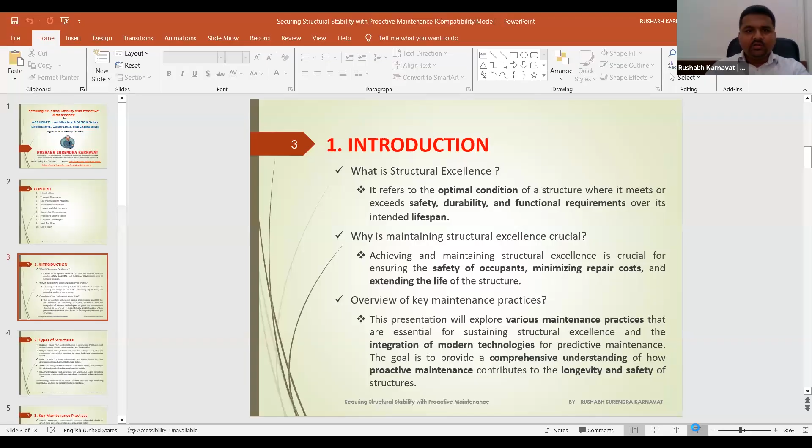Starting with the introduction, what is structural excellence? It refers to the optimal condition of the structure for which it is designed, and it always meets or exceeds the safety, durability, and functional requirements over its intended lifespan.

Next is why maintaining structural excellence is crucial. Of course, it is crucial for the safety of the occupants, minimizing repair costs, and extending the life of the structure, or what I can say, at least remaining the life of the structure for what it has been designed for.

Overview of the key maintenance practices: this presentation will explore various maintenance practices essential for sustaining structural excellence, or structural stability, and the integration of modern technologies for predictive maintenance. The goal is to provide a comprehensive understanding of how proactive maintenance contributes to the longevity and safety of the structures.

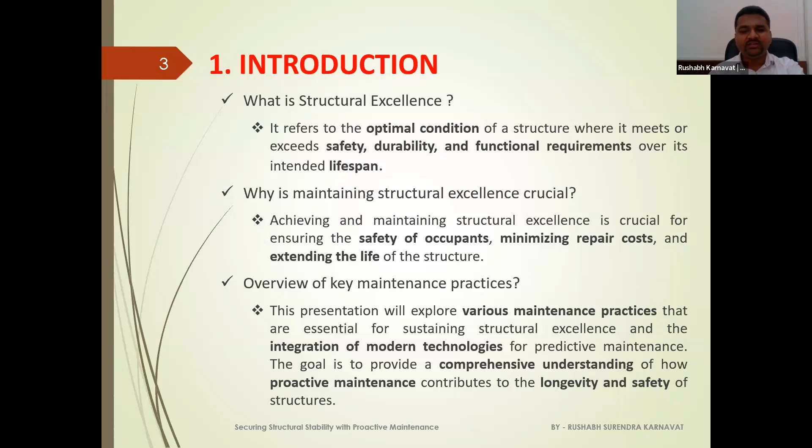Let's understand the types of structures, like basic buildings: residential homes, commercial skyscrapers, or composite structures, residential, commercial, or industrial, which require upkeep to ensure safety and functionality.

Then bridges: of course, bridges always play a vital role for transportation networks, and their inspection and maintenance are needed due to their exposure to heavy loads and environmental factors. Just two months back, we heard that more than 12 bridges collapsed in a state - not ours - and dams need rigorous monitoring to prevent structural failures.

Dams are critical for water management and energy generation. Towers, including communication towers or observation towers, face challenges like wind and weathering that can affect their stability. Industrial structures such as factories, warehouses, and PEBs these days require specialized maintenance to withstand harsh operational conditions and ensure worker safety.

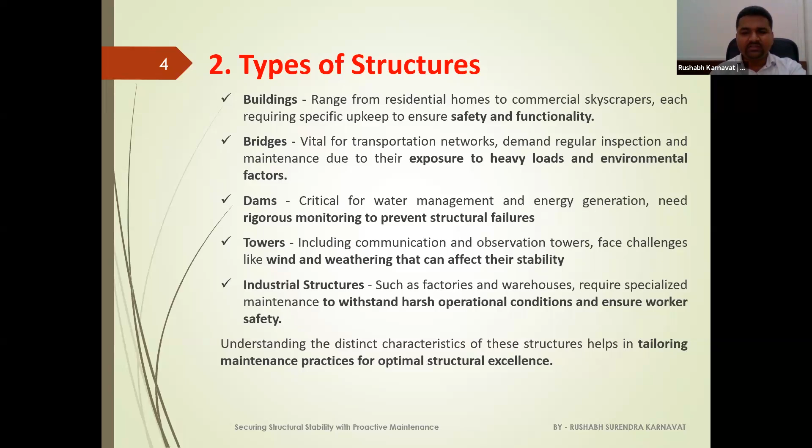Understanding the key maintenance practices: first is regular inspection. If the diagnosis is not correct, the treatment won't be given properly. So regular inspection always plays an important role, involving scheduled routine checkups which detect early signs of wear and tear, damages, and potential failure.

Preventive maintenance - as someone beautifully said, prevention is always better than cure. So the key maintenance includes preventive maintenance, which focuses on routine upkeep activities such as cleaning, sealing gaps and voids, or minor repairs, which are designed to prevent more significant issues from arising.

Corrective maintenance is what I believe is called treatment, necessary when unexpected damages occur requiring immediate repairs - like in rainy season, when leakages start, immediate repairs restore the structure's integrity.

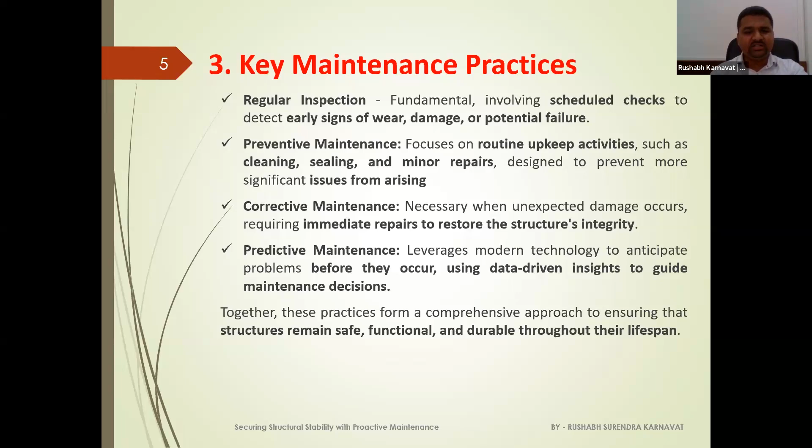Predictive maintenance leverages modern technologies for anticipating and predicting problems before they occur, using data-driven insights to guide maintenance decisions. Together, these basic four practices form a comprehensive approach so that structures remain safe, functional, and durable throughout their lifespan.

Now understanding the inspection techniques: first comes visual inspection, the most basic but essential method, allowing detection of obvious issues such as cracks, corrosion, misalignments, seepage, leakage, or dampness.

Next is non-destructive testing, for deeper insights, like ultrasonic testing, magnetic particle testing, dye penetration testing, or radiographic testing, which help identify internal flaws without damaging the existing structure.

Now comes structural health monitoring, which takes inspection to the next level by using embedded sensors and technologies to continuously monitor the condition of the structure in real time, which always detects changes that could indicate potential problems.

In the last decade, drone inspections have become increasingly popular for assessing hard-to-reach areas. Recently we did some inspection for an ESR where it was very difficult, hard-to-reach areas, so drones provided detailed aerial surveys that can reveal issues not visible from the ground. So drone inspections are becoming popular day by day.

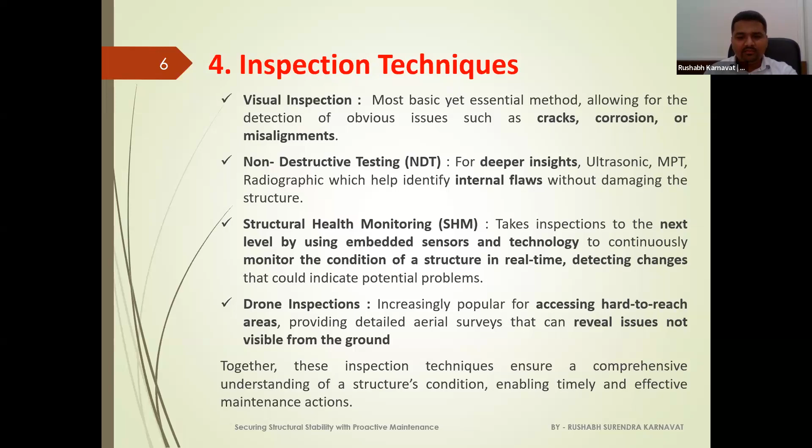Now let's understand the preventive maintenance.

What I mean is regular cleaning is a key aspect involving the removal of debris, dust, dirt, and contaminants that can lead to deterioration, especially in areas exposed to the atmosphere or environment.

Surface protection is becoming popular. People protect using protective coatings and paints. Earlier, paints were used just for aesthetic purposes, but nowadays they provide protective coatings as well, like anti-algal, anti-peeling, or waterproofing properties to existing structures, and sealants for materials like concrete and steel against weathering and environmental factors.

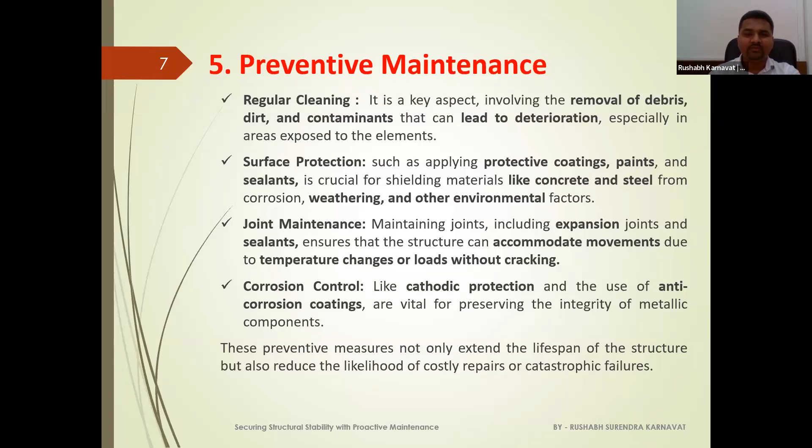Corrective maintenance, when we talk about it, we call it treatment. Repair techniques such as patching cracks - in monsoon season you might see potholes everywhere and patchwork going on, or resurfacing damaged areas, like when we go for restoration of RCC buildings. If you're traveling by road, you'll see patchwork going on in RCC buildings.

Replacement - in some cases, patchwork won't suffice the purpose, so components that are too damaged, or beyond logical and economical repair, then replacement entirely replaces the complete surface or that particular member. Reinforcement may now be necessary to strengthen weak areas prone to stress or compromised due to various reasons.

So corrective maintenance ensures that any detected issues are promptly and effectively addressed, preventing minor problems from escalating into major structural failures.

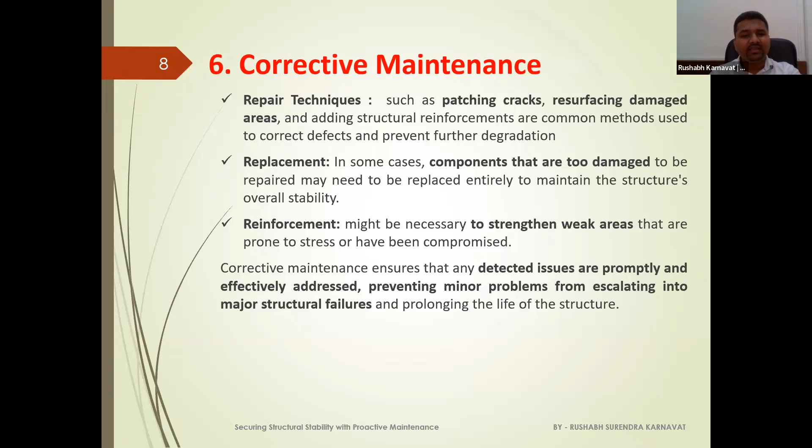The third one is predictive maintenance, like technological integration - in today's era, integration of IoT sensors, data analytics, and AI. They continuously monitor the condition of structures.

Data-driven decisions - these technologies collect and analyze real-time data. They always detect patterns such as unusual vibrations, temperature changes, or material stress. By leveraging this data, maintenance teams can make informed, data-driven decisions, addressing potential issues proactively rather than reacting to failures.

So we are predicting the collapse pattern or something which is going to go wrong, and accordingly we are doing the maintenance program. Predictive maintenance not only helps reduce downtime and repair cost, but also significantly enhances the safety and reliability of structures.

Many case studies have shown that structures equipped with predictive maintenance experience fewer unexpected failures and maintain a higher level of performance over time.

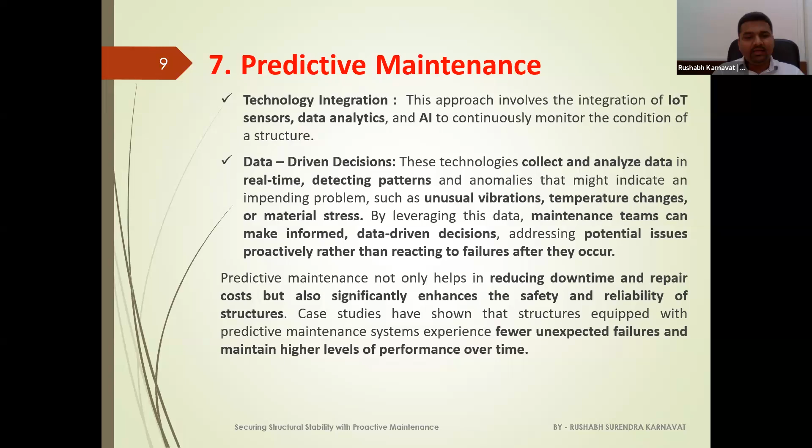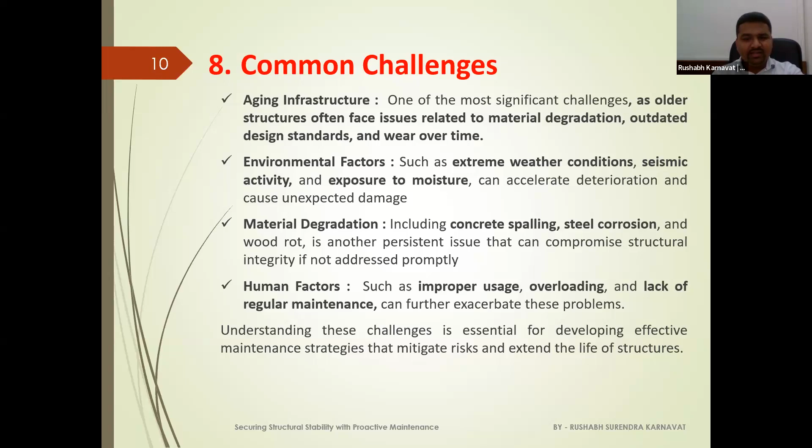Human factors such as improper use, overloading, and lack of regular maintenance can further exacerbate these problems. Understanding these challenges is essential for developing effective maintenance strategies that can mitigate risk and extend the life of the structure.

Best practices - we believe comprehensive planning involves developing a detailed maintenance strategy which includes routine and periodic maintenance. We used to audit various RCC buildings, like cooperative housing societies, and always give them do's and don'ts for routine and periodic maintenance.

Collaboration, of course, including engineers for assessment, inspectors for conducting actual testing on site, facility managers, material manufacturers, from routine checks to emergency repairs. All stakeholders need to come together and collaborate for safety, for human life, and to avoid big property losses.

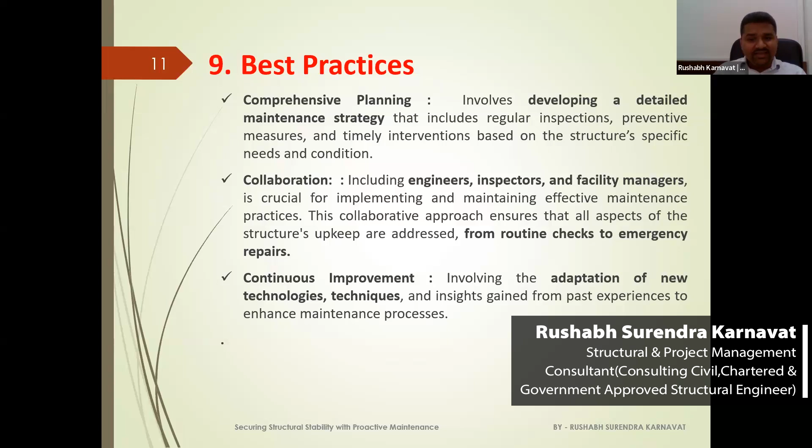Continuous improvement involves adaptation of new technologies, techniques, and insights gained from past experiences to enhance the maintenance process. Even our SSR is also adopting such new items or application of new items. So continuous improvement is the best practice, in my belief.

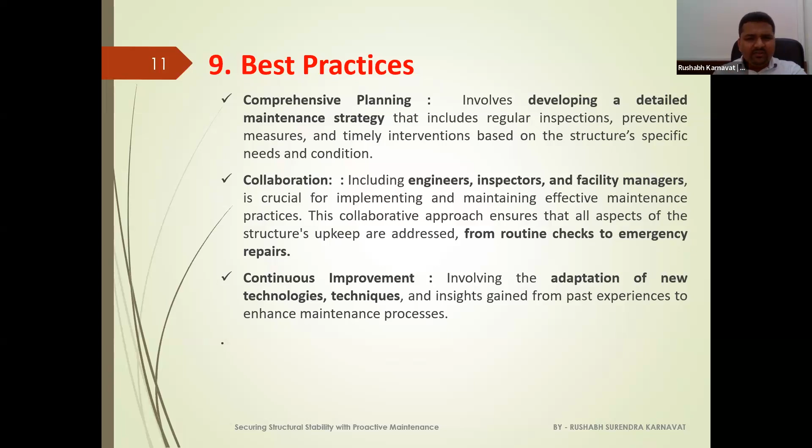So to come to the conclusion - maintaining structural excellence is a multifaceted process that encompasses regular inspections, preventive and corrective maintenance, and the integration of advanced technologies for predictive maintenance.

The importance of proactive maintenance, considering all three different types, cannot be overstated, as it helps prevent costly repairs, ensures operational efficiency, and protects both users and the investment.

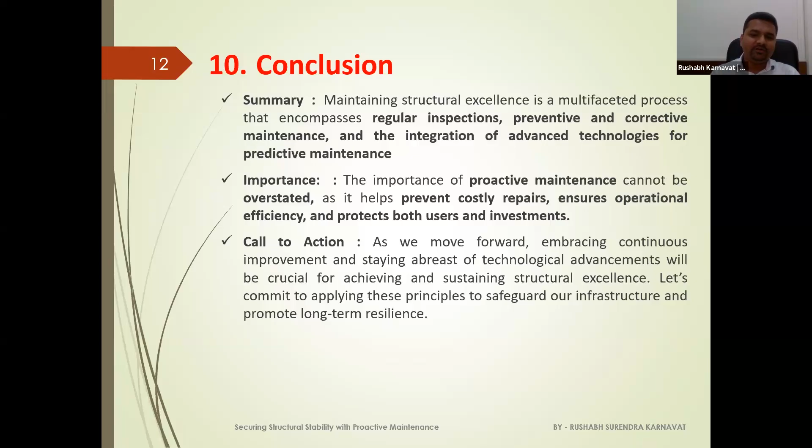As we move forward, embracing continuous improvement and staying abreast of technological advancements will be crucial for achieving and sustaining structural excellence. So let's commit to applying these principles to safeguard our infrastructure and promote long term resilience. Thank you, here I conclude.